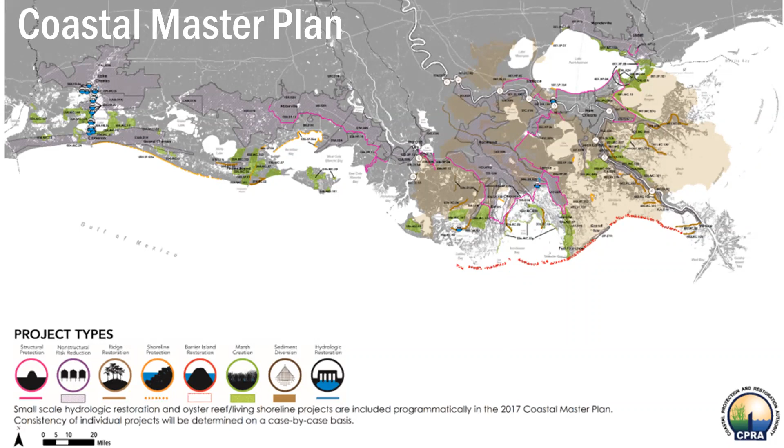Everything we do in terms of project delivery is guided by our coastal master plan. Just last week, our 2023 edition of the master plan got approved. This is a quick snapshot of the 2017 master plan for visual purposes, but you can see it's a $50 billion 50-year plan, evenly split between restoration and risk reduction flood protection projects.

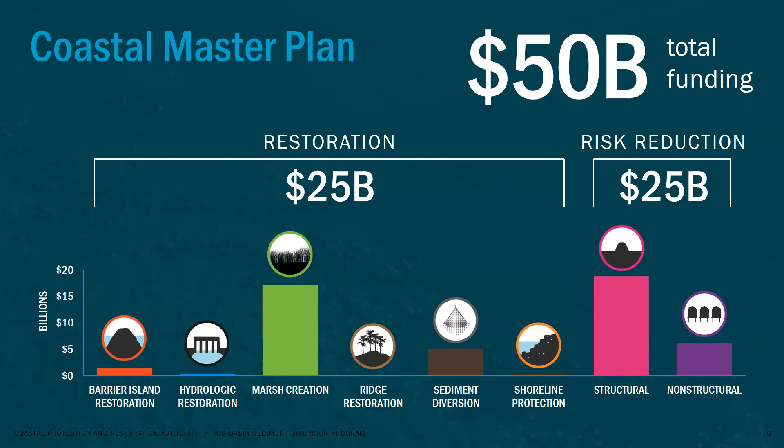Our funding picture: our annual plan was actually approved last week as well by our board. It heads to the legislature. But you can see here, in addition to producing a master plan every 6 years, every year the legislature requires us to give a forecast for our spending in that fiscal year.

The forecast for this particular fiscal year 24, which starts on July 1st, is $1.74 billion, with 85% of that being dedicated to construction projects. So that's a very impressive stat, something we're very proud of. The money that flows through this agency directly gets put into projects on the ground.

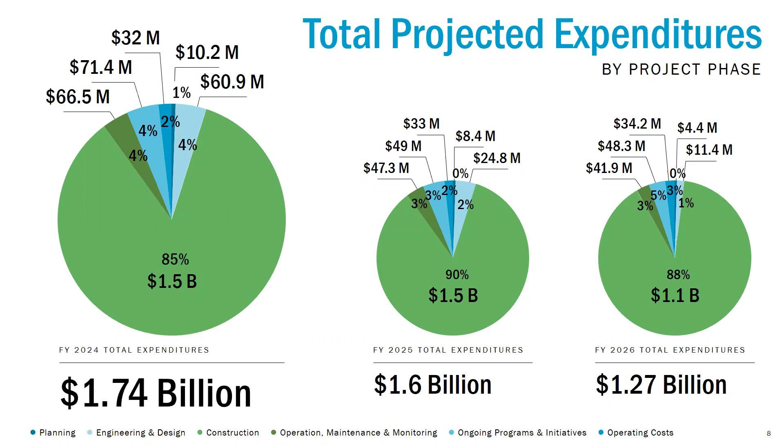Moving forward, you can see that number does start to go down as the oil spill settlement dollars continue to be spent. But once again, we continue to build projects, or use the majority of our funds to build projects that we've been designing over the years.

Here's our current active project list. You can see, to double down on what I just said, we've got 40 projects in construction between contracts that CPRA owns, as well as projects we're funding through our partners. And you can see there as well in the engineering and design being prepared for construction, 57 additional projects. We'll kind of visit on each of those two branches of project delivery and talk about the contracts and how we hire people to do that work for us.

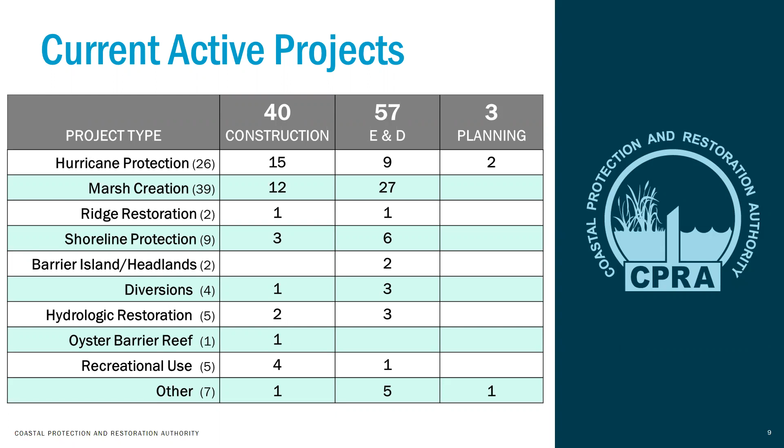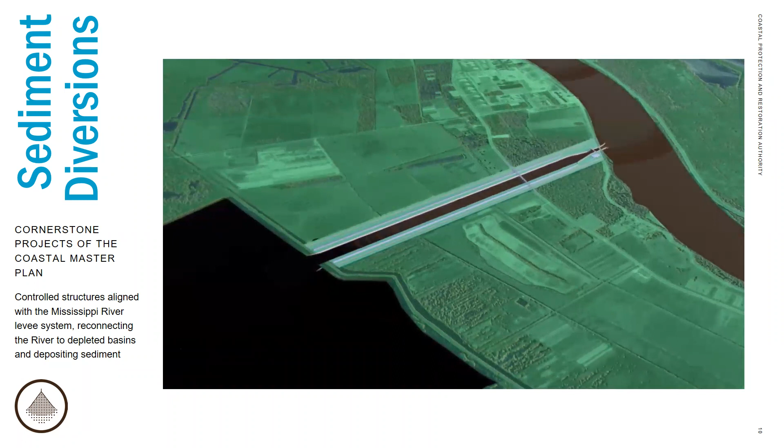Kind of getting into a few details if you're interested in the type of projects that CPRA works on. In the past several editions of our master plan, a cornerstone has been diverting Mississippi River water and sediment to rebuild parts of our coast.

The project that is nearing construction, and we hope to have it under construction this summer, is the Mid-Barataria sediment diversion. You can see here from this little cartoon kind of what that project looks like and how it will work. At certain times of the year, the gates would be open, water and sediment would flow down a man-made canal that will be constructed, flow into the marsh and rebuild the wetlands, just like Mother Nature did several thousand years ago.

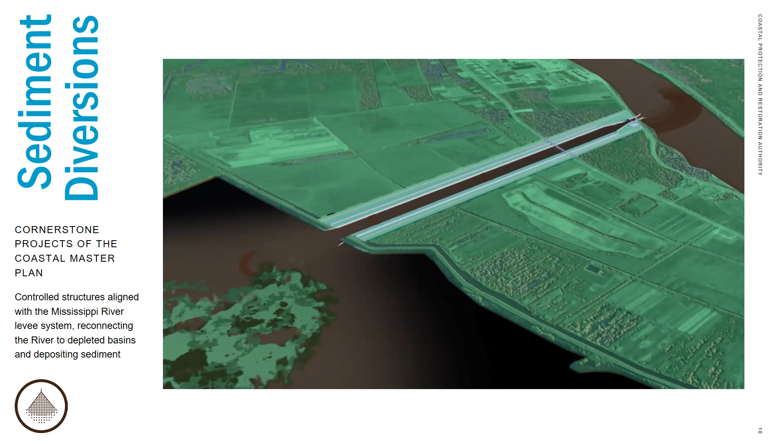Flood protection, it's the P of CPRA. In addition to the projects we work on here, we support many of our partners, whether it be federal agencies or some of the levee districts and local parishes in implementing flood protection projects. And what you see on the screen before you is the Morganza to the Gulf system, which I think protects hundreds of thousands of people in the greater Houma area, in and around Houma, Louisiana, Terrebonne Parish.

This is an ongoing effort. It's a project that was started decades ago. It's many different projects all being constructed to serve the common purpose of completing this entire system. Earthen levees, concrete walls, pump stations, environmental structures have all been designed and constructed and continue to be designed and constructed under this program.

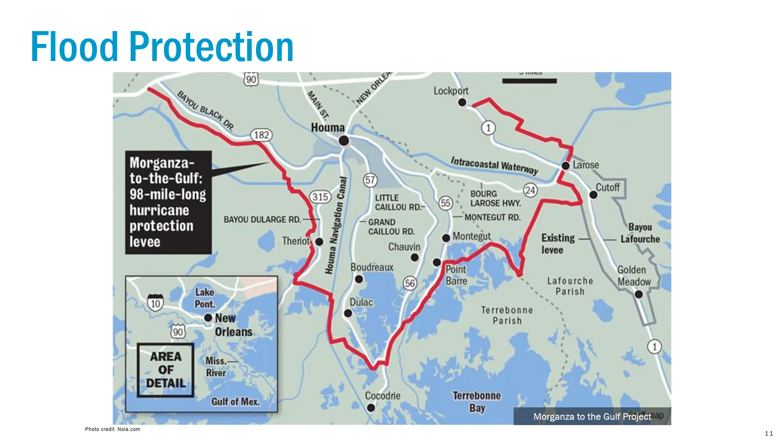Shoreline protection. If you've worked on coastal projects in other parts of the country, or if you're familiar with coastal engineering work, one of the most tried and true measures is placing hardened structures, rock, riprap, concrete, other hardened features on a shoreline to protect from erosion caused by waves.

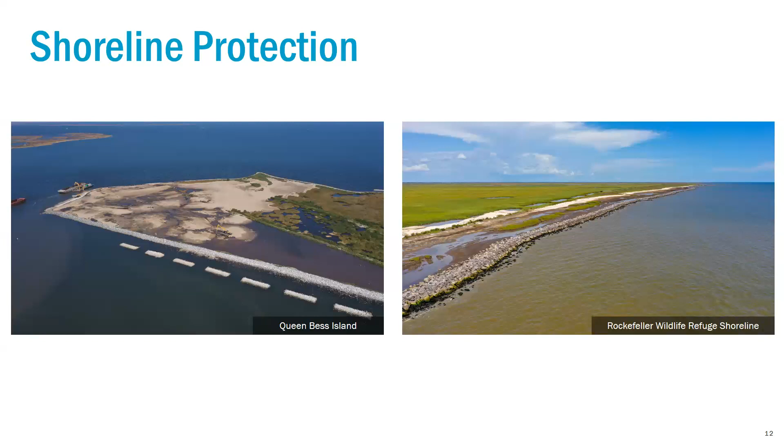And we also recently have worked on several small scale projects. And I give this example to kind of give a snapshot of what may come in a newer program that we're involved in, which is the Atchafalaya Basin program, where we may see the types of projects that you see on the map. Fishing piers, boat launches, you see a nature walk at the Cypremort Point area there. We do envision in the future we may see similar projects in the Atchafalaya Basin program, which is one of the goals and purposes there. So over the years, our agency has designed, bid, and constructed several types of recreational use projects.

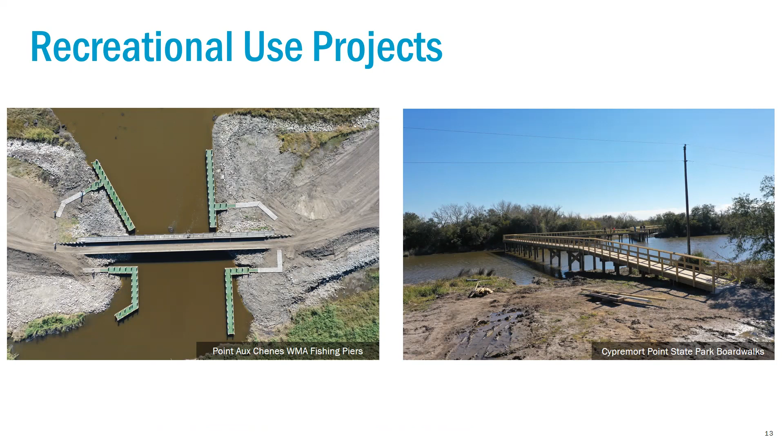Most of the work, as mentioned in that stat slide earlier, has been accomplished with the use of hydraulic dredging equipment. You can see the picture on your left is the front view of a hydraulic dredge with its cutter head up out of the water. Normally that piece of equipment has the cutter head in the water at the bottom, agitating the sediment and actually pumping it through a series of pumps through a pipeline.

The other end of that pipeline looks like the picture on the right, where you see the dredged sediment slurry spewing out into the marsh. You see the earth moving equipment moving it around, making sure it's built to grade. So when we deal with directly building land, most of the time we're using hydraulic dredging equipment.

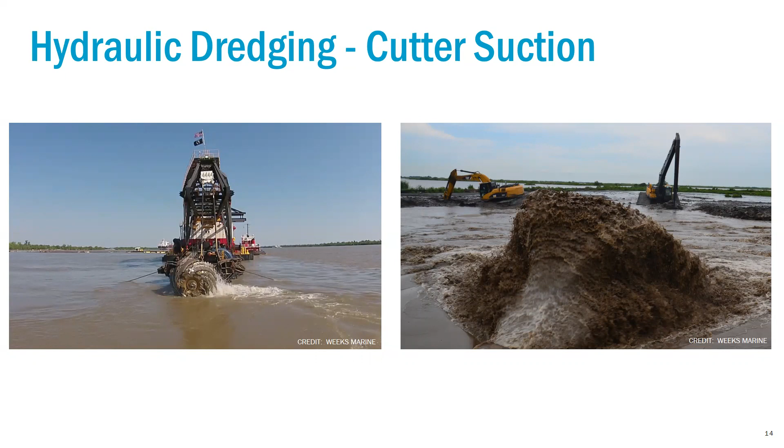Over the years, 72 miles of barrier islands have been done with dredging by hydraulic dredges. The sand on this island, Shell Island West, several years ago was actually pumped from the Mississippi River, which is about 20 miles to the north of here, through a pipeline and a series of booster pumps from a hydraulic dredge in the river.

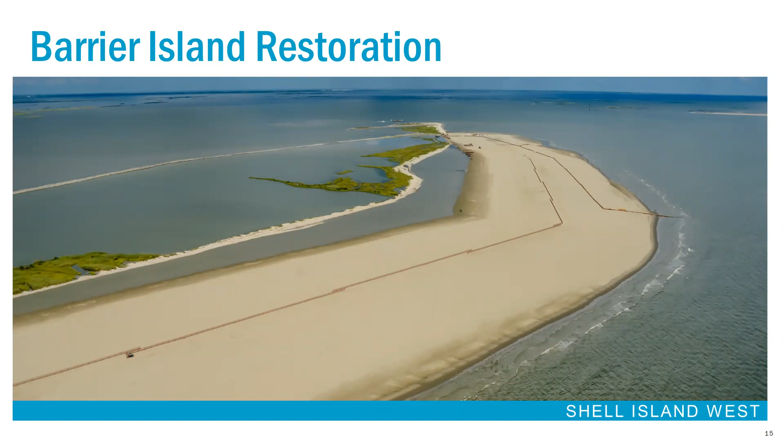But you can kind of get a picture of the size and scale of these barrier island projects when we construct them. Our most recent project, the West Grand Terre Barrier Island project, was recently completed. If you're familiar with Grand Isle, this is the next island over to the east from Grand Isle. The video here gives you a good perspective of what the construction site looks like while we're building that. So this pipeline has come from several miles offshore in the Gulf of Mexico.

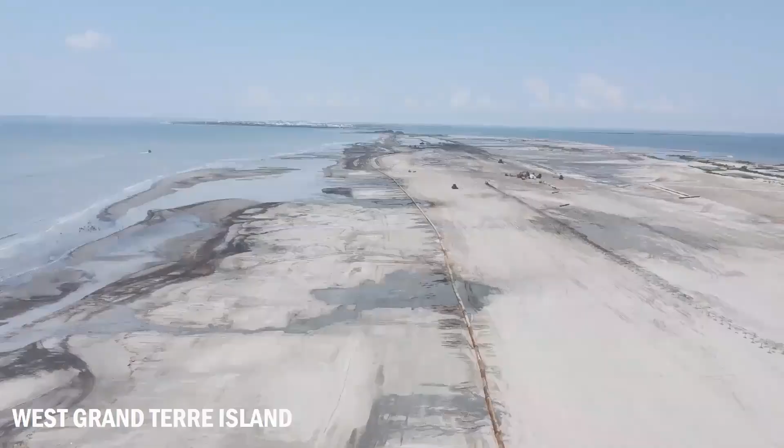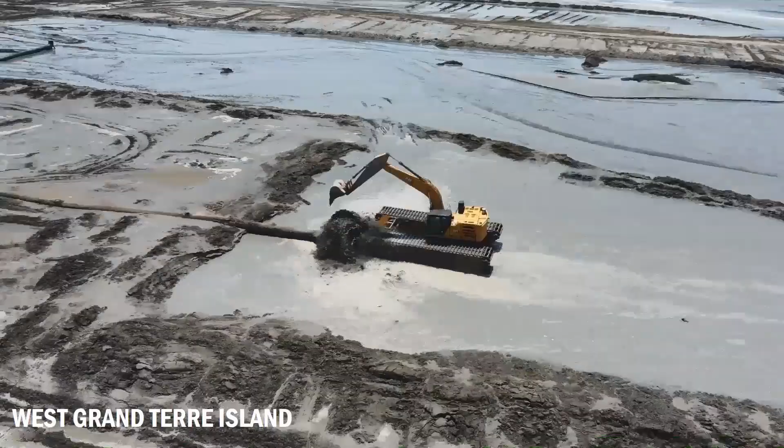You can see they're oftentimes split. The split to the right is pumping sand. You see the marsh buggy excavator helping to move that material around. See the longitudinal dikes helping to increase that retention time, let the sediment drop out, and we have a beach at the end. This project was completed in the latter part of 2022, and it's our most recently completed barrier island project.

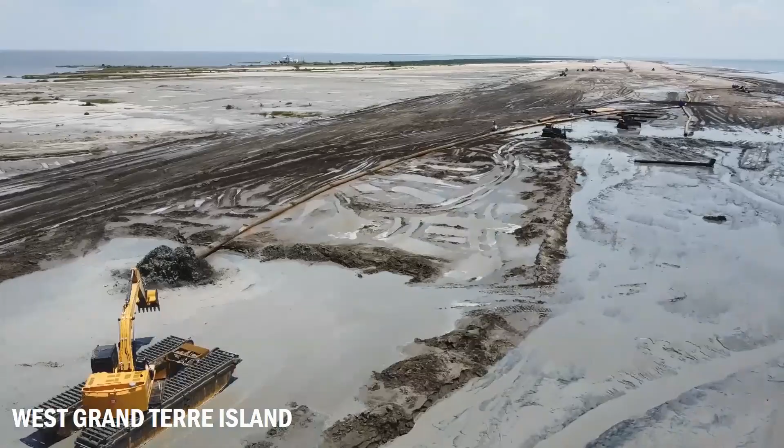Marsh creation, that table I showed you, is probably the most common project that we design and construct. I think we have 12 of these under construction as we speak. Just to give you a feel, same concept as a barrier island. You're pumping sediment from some body of water out the end of that pipe. Once that material is deposited, it's drained and dewatered.

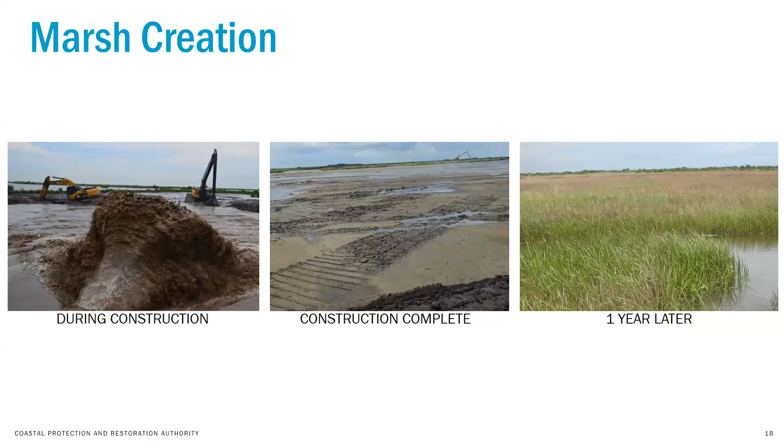A lot of dredge contractors have worked for Louisiana, but in addition to the dredge contractors, we also have a lot of support equipment. You can see our most recent large-scale project that's under construction, the Lake Borgne Marsh Creation project. It's actually the largest marsh creation project by acre we've ever designed and built, 2,700 acres of marsh.

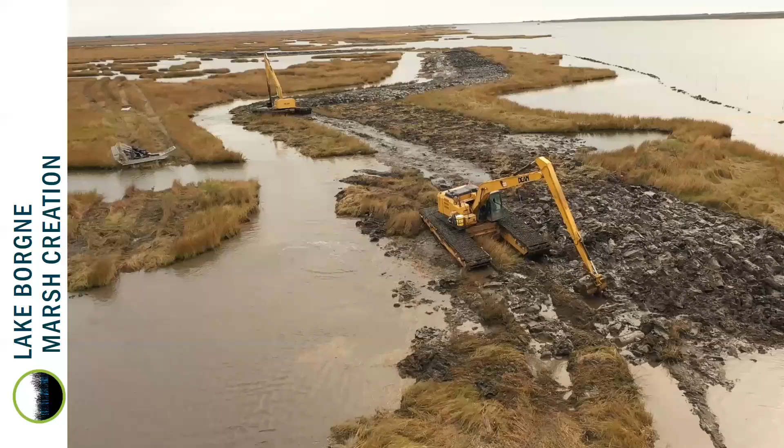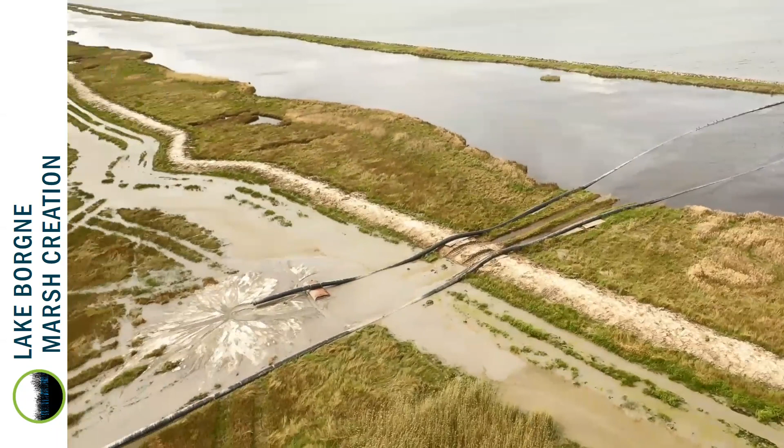This video shows some of the support equipment building the earthen containment dikes. In a little while, you'll see some of the marsh slurry that has been pumped. We're right at the beginning phases of this project in terms of the pumping part. This project will be ongoing for quite some time, given that it's over 2,700 acres of marsh being created. But it is one of our most recent and largest scale marsh creation projects that we've been working on in terms of construction. We put a lot of focus on earthen containment dikes.

So even though the hydraulic dredging component of these projects is critical, the support equipment and the support subcontractors are also critical. A marsh creation project can only be as successful as the earthen containment dikes that we build around it. Basically, we build small levees around the perimeter of the site. Dredge material is pumped in. The earthen containment dikes help contain that material and keep it on the footprint that we intend to build.

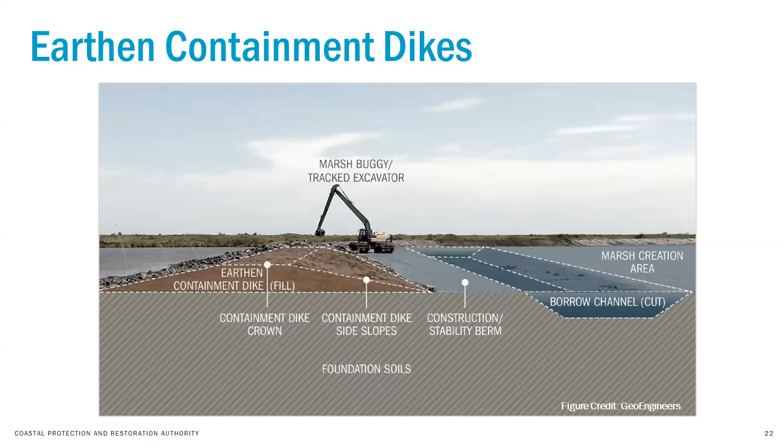You can see from this little cartoon, which was provided by GeoEngineers, that the excavator is digging from the inside of the marsh creation area and depositing that material to the left on the dike footprint. That pit, that borrow channel that you see there, will be infilled once the dredge pumping is started. This is a great series of pictures from Southwest Louisiana near the Calcasieu Ship Channel that shows you what that little schematic is in real pictures.

You see the first lift place chunks of really good clay in this situation just to get up to elevation. Other pieces of equipment will come behind that first lift or second lift and actually smooth and grade that to the proper elevation. And then once that dike has hit the sun and is allowed to dry, it actually has a good bit of structural integrity and it serves its purpose, just to give you a feel for that.

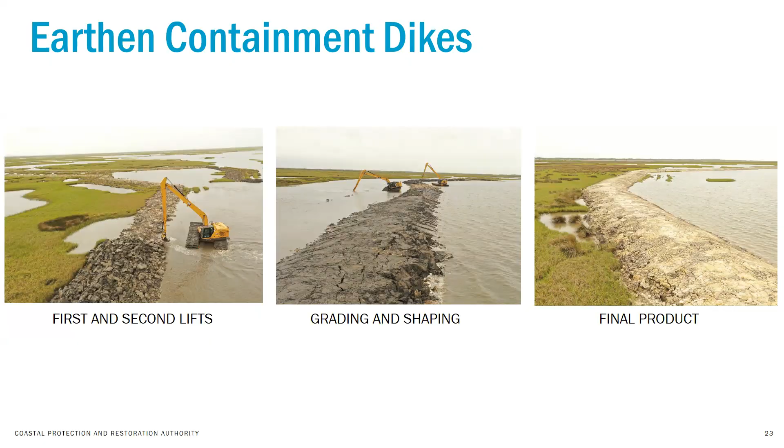So that was a quick kind of 10-minute background on really all the primary things we accomplish in terms of the project types as an agency. The next series of slides will really get into the contracting mechanisms, an overview of those contract types, what we use those for, and then we'll visit on the construction side as well.

So at least for the intents and purposes of today's conversation, we'll talk about really three types of contracts: professional services, which are going to be your engineering, surveying, geotechnical; consulting services, which is your science, environmental contracts; and then construction. We'll start with professional services. You can see there engineering, geotechnical, surveying. All of our design, a lot of our analysis in terms of geotechnical and testing, and surveys are done through professional services contracts.

They can be project specific, so we have awarded a solicitation for a specific project, but the agency does hold several retainer contracts or indefinite delivery, indefinite quantity contracts. That is our most frequent mechanism for awarding professional services work through contract. So you can see there that second bullet, large scale design efforts may involve project specific solicitation. For example, the Mid-Barataria sediment diversion was over a $40 million design effort. We did not use one of our retainer contracts for a variety of reasons. We did a project specific solicitation to award that contract, and we've done that several times over the years.

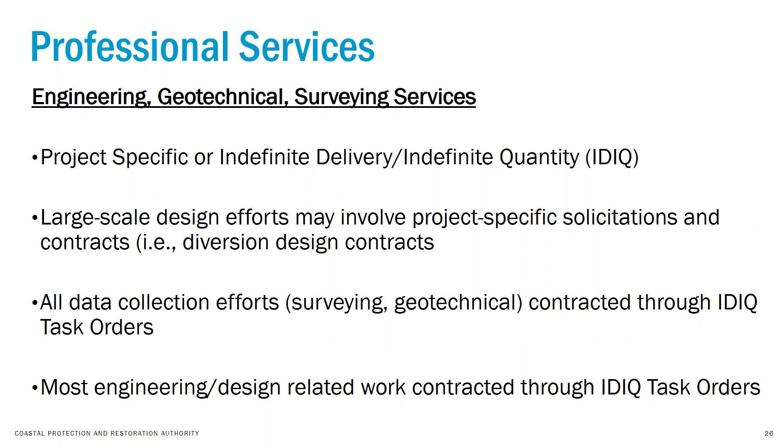You can see the third bullet, all of our data collection efforts to support our in-house designs, survey and geotechnical, are done through these contracts. And like I said before, most of it has been through IDIQ task orders. So we have a series of contracts put in place. They're on retainer for a contract, a do not exceed amount, and then we issue task orders against those contracts. So that actual IDIQ contract is acquired through a qualifications-based solicitation. It has to be qualifications-based in the state of Louisiana. There cannot be a cost component associated with the award of a professional services contract. It can be awarded to one or more firms.

3-year max is state law. Our retainers specifically were staggered previously, so they began and ended on different years. And starting in January of 23, they're all on the same cycle. So all of our contracts for the professional services side recently started in January 2023 and will end 3 years later. Here is the current breakdown of the amount of contracts that we have. Like I said, January 2023 is the start date, December 2025 is the end date.

21 total professional services engineering contracts in the engineering category. Within engineering, we have 3 subcategories: general engineering, coastal engineering, and limited services. You can see the breakdown there. Limited services being targeted to small Louisiana-owned businesses, Hudson Initiative, veteran-owned companies. 7 geotechnical services contracts at $1.5 million apiece, and 8 surveying. As I said, these contracts just began about 5 months ago. So our next solicitation, in anticipation of starting a new round in January of 26, would be a mid-2025 solicitation date.

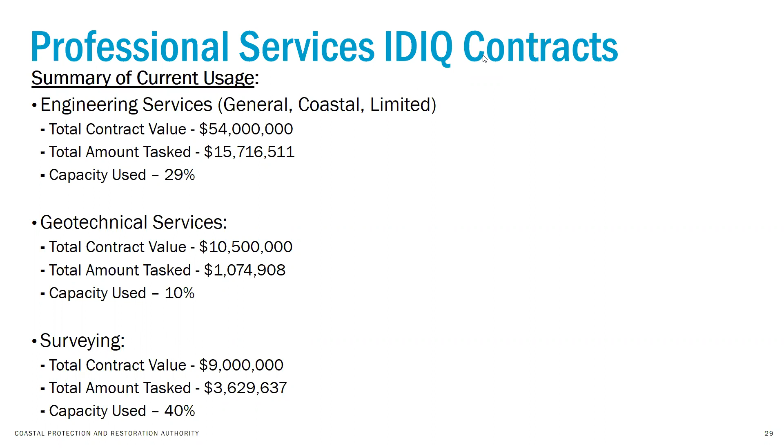Consulting services, very similar to professional services. These are the contracts that are put in place to assist the agency with all things pertaining to environmental science and planning. Any type of consultation, investigation in terms of cultural resources, environmental studies, program management, anything of that nature is done through a consultant services contract.

Really the same rules apply for the most part. It can be project specific or through a retainer IDIQ. The only major difference in the solicitation is there is a cost component in the scoring of the proposal. A rate sheet has to be provided, and that is scored. It's a very similar 3-year solicitation schedule, so they're on a very similar schedule to the professional services.

We currently have 10, $3 million each. Basically, the term is summer of 22 to summer of 25. So you would expect to see the next solicitation in a late 24, maybe early 25 timeframe in anticipation of getting those new contracts up and running for the fall of 25. The usage there, 30 million in total contract capacity with about 3.4 million used at 11%.

So I mentioned we have some solicitations there. The IDIQs are a good ways out. However, the agency does put out project-specific solicitations at times. If you are interested in working for the agency in terms of professional or consultant services work, on our homepage, front and center is the RFP, RFQ, and contracts button. It's denoted by a small excavator. Once you hit that link, you will see two others, contracts and procurements and professional consultant services. The green button is where all of our solicitations would be located.

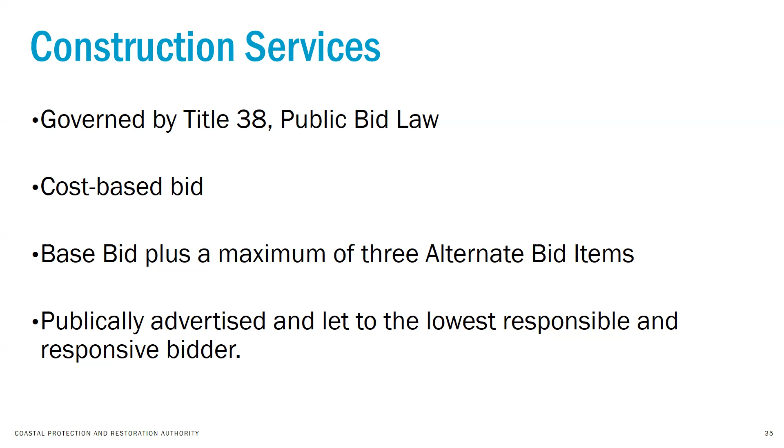So we'll spend probably the next 5 minutes or so talking about recent trends, and this is for those on the webinar who have worked on public works projects. This is an issue that we've been seeing since the beginning of 2022, and that is just as anything else, a gallon of milk, a gallon of gas, or any other thing you buy, we have seen increased construction costs across the board due to inflation and a variety of other reasons.

And for the most part, and this list can be added to definitely, supply chain issues, getting goods to site, of course, material prices, labor shortages, and fuel prices, all are driving at least our projects. These are some of the main culprits. A lot of our projects are being built in areas where a lot of industrial construction is happening. So it is difficult for some of these contractors to get a dedicated labor pool there, given some of the locations of the project.

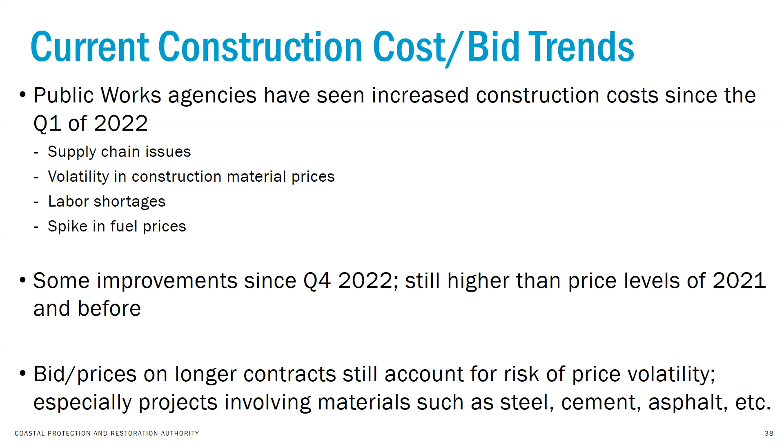We've spoken to a lot of other public agencies, the Corps of Engineers, DOTD. They're seeing the same sort of trends across the board on a lot of projects that they've been bidding as well. So unfortunately, we have projects to deliver. We don't have the option to ride this out. And so we'll kind of discuss what we're seeing and how we're addressing it coming up here.

That doesn't necessarily mean the projects were not awarded. We'll discuss that in a little bit. But that kind of gives you a picture when you summed everything up of where we landed over the projects that we bid. Looking forward, from present day on into the end of 23 and beginning of 24, we're anticipating a large amount of bids to come out of the agency, as you saw yesterday.

That doesn't necessarily mean we're going to need $51 million more dollars to award these projects. I'm just saying if you went to the original budgets and made no adjustments to your design, and then went to a more updated cost estimate based on recent trends, this is the deficit that you would see if you were to take that approach.

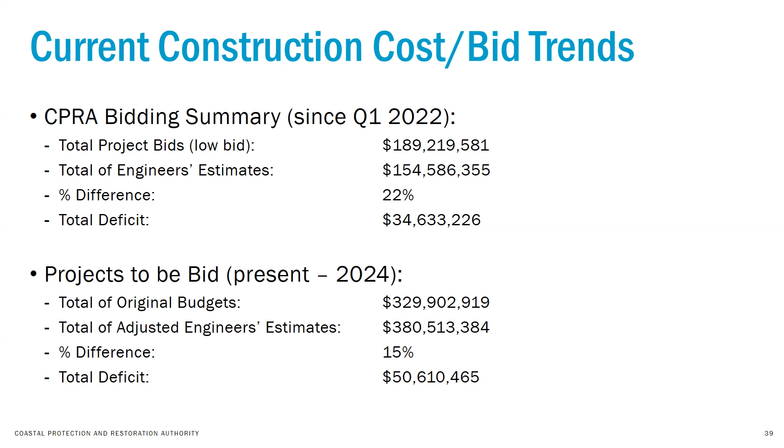So for example, a couple of projects have looked at the marsh creation site that's the furthest pump distance, being the most costly, and maybe decided to eliminate that. We have taken advantage of alternate bid items more so than we have ever in the past. We are starting to put projects out with 2 and in some cases 3 alternate bid items to make an attempt to get to the full footprint of the project. If we were to get low bids, we'll award as many options as we could in that situation.

And then at least one time we have rejected bids because we could not afford to award the project. That is probably the option of last resort, is to reject bids. But at the end of the day, if the bids are so extraordinarily higher than our budget, we have no option there. I think a lot of you out there in terms of engineering consultants and contractors are very familiar with these conversations. CPRA is doing the best we can to balance it.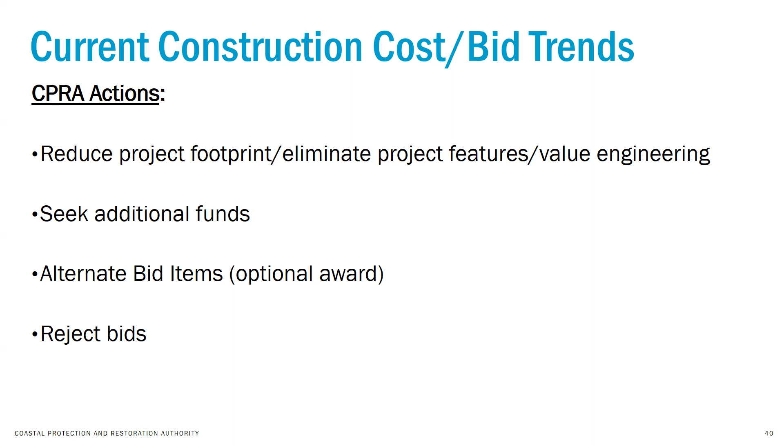But what I just presented to you in the past several slides is what we've seen here as an agency, and what we're doing about it in terms of the way we're approaching the bid documents. So once again, the second bullet is there because we have had 1 or 2 projects that have had that luxury, but for the most part, we've been in a situation where the original project as conceived does not look as large and has been reduced down in order to get to an award.